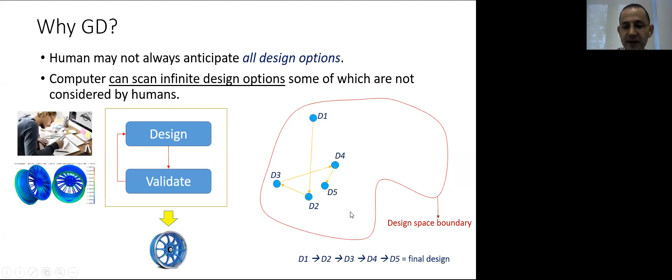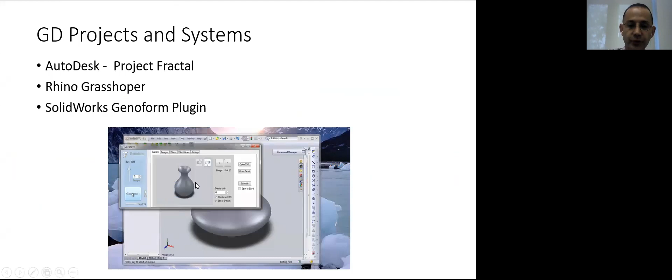So you see here on the left side, there is a cup. So we parameterize this wine glass using design parameters. For example, here we have one cubic Bezier curve for the bottom part. For the top part, we have another Bezier. So these are alpha 0, alpha 1, alpha 2, alpha 3. These are the design parameters. These are the coordinates. Once you change these coordinates, you can generate new designs. So a CAD model for a wine glass with its design parameters.

On the right side, you can see a CAD model for a yacht hull with its design parameters. In case of the yacht model, we have entrance length, middle length, and aft length. Here we have an angle, the entrance angle. We have depth for the entrance section, middle section, and aft section. So first of all, you should define your CAD model using parameters. This is the parameterization step before using generative design algorithms.

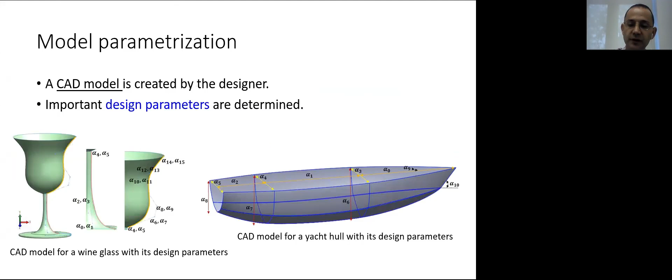So the next step is to set the design space. You can think of the design space as a box. If you have just two parameters, you have a rectangular space with two dimensions. If you have three design parameters, for example, length, width, and height, you have a three-dimensional space. So how do you set your design space? You should first determine the parameter ranges so that you can define a box as a design space.

And next, you should determine and quantize the design specifications. These serve as geometric constraints, defined in advance before starting your design. For example, if you want to design a car, you should at least know its length. If you design a yacht hull, the customer gives you a design specification. He wants you to make it, for example, 1.5 meters high. These are already defined before starting generative design.

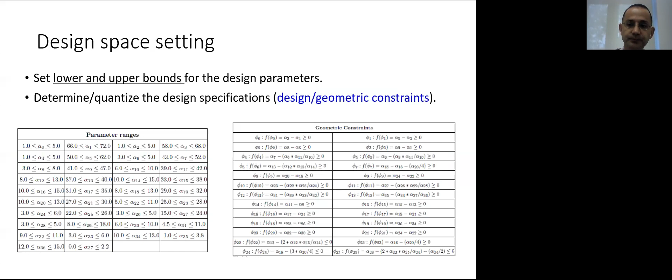So once you define your design space and parameterize your model, you should select the generative design algorithm for your application or propose a new GD algorithm specifically for your problem. You can see here on the bottom a ceramic ewer body. All of these are generated using the generative design technique. So what you should do is use a GD algorithm.

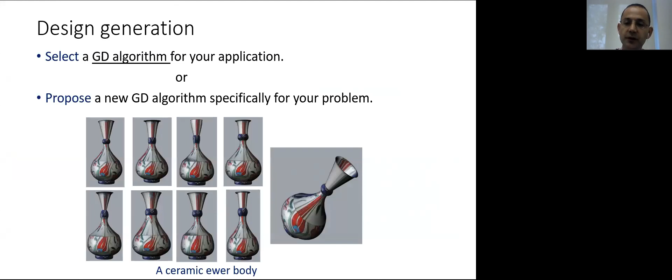So next, I will explain a GD algorithm. This is proposed by our group and published in Computer-Aided Design and Graphical Models journals. So first of all, we should parameterize the model. Let's define some important notations here.

A shape or a design is represented using n-dimensional design coordinates. So we have x1, x2, and xn. Each of these parameters represents a design parameter. Each coordinate here, x1, x2, and xn, represents an axis in the design space.

So for example, if we have a design parameter which is length for a yacht hull, this length parameter represents a dimension, or we can say represents an axis in the design space. So if we have n design parameters, we have an n-dimensional design space. So actually, generative design is a high dimensional problem.

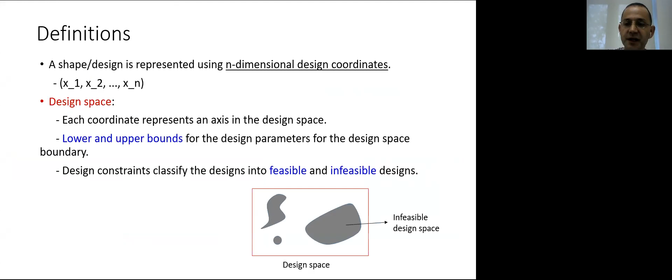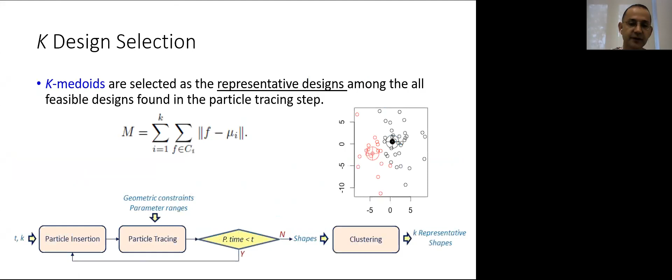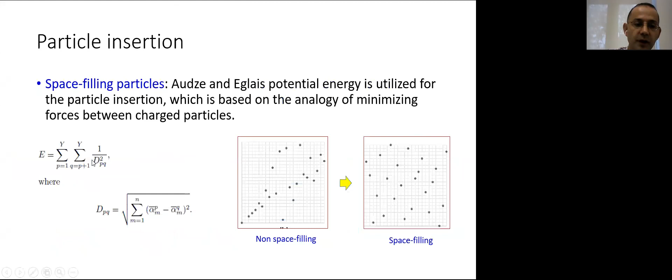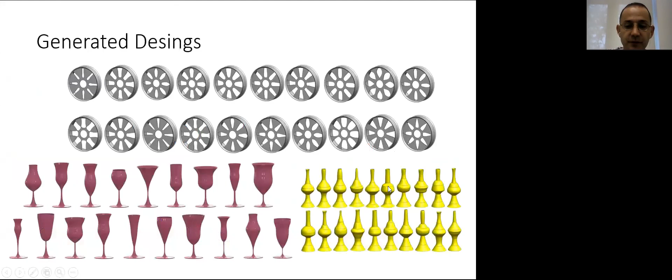So you can see here the examples for wine glass. You can see very interesting shapes here. Some of them may not be producible, but if you include the manufacturability constraint here, you cannot get some infeasible shapes. So these shapes are generated by our algorithm. So this is yacht hulls. Once again, there is no user here. So if you want to check more details, you can refer to these 2 papers, which were published this year, 2018.

Okay, next, I'm going to explain 2 application scenarios for generative design. The first one is for yacht hulls. So here what we did was we introduced the adjective-based design concept in yacht hull design. You may hear it for the first time. In adjective-based design, we express hulls with adjectives such as strong, speedy, and aesthetic. So let's say you have a design model, a CAD model, and you want to make it look strong. What you should do is use our adjective-based hull design framework, and then you can automatically generate a strong model. Otherwise, you should strive for the generation of strong hulls, which may take more than an hour, 1 hour or 2 hours.

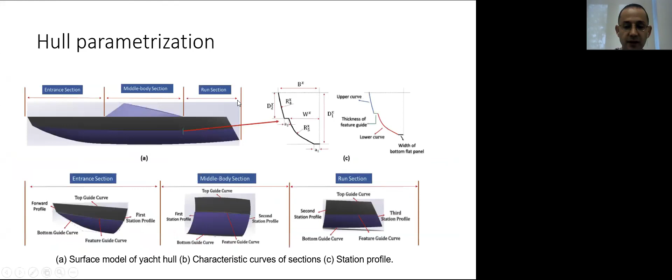If we get the sectional view here between middle body and run section, you can see its appearance. So we have one depth parameter here, a width parameter here, and many more parameters. Similarly, we have length, entrance angle, and so on. So actually, here we have more than 50 design parameters. As I said in the previous slide, we have entrance section, middle body section, and run section. These parameters represent the run section, and others represent middle and entrance sections. When you set these about 54 parameters, you can generate a hull.

So once we parameterize it, what we should do is, for our adjective-based design approach, we should learn the hull adjectives. So actually, we did a survey with more than 100 students in our faculty. So we show some yacht hull models to the users via a Google spreadsheet survey.

So the question here is, which adjective can represent the yacht hull shown below? So you should write here an adjective. So we have a list of adjectives such as strong, aesthetic, compact, and so on. So we did a survey with the students, and at the end, we checked the usage frequency for these hull adjectives. So you see here, the speedy adjective is used more than 100 times. The strong adjective is used more than 80 times, and so on.

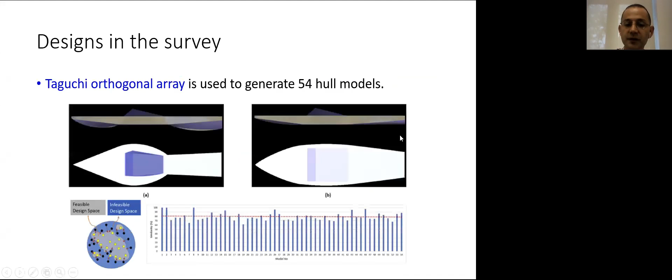So the next issue is to correlate our design parameters with hull adjectives like strong, speedy. So here we use the Kolmogorov-Gabor polynomial to represent the correlation. So it is a polynomial representation. It's a nonlinear one. Here we have y. Here y represents our adjective. For example, in case of the strong adjective, the value of y should be greater than 1.0. So here x represents my design parameter, and a0, a1, a2 are the coefficients which are coming from our neural network.

Can I have a question? What is the full name of GMDH? Group method handling for deep, just a minute, grouping method. I should check it. I'm not very sure, but G is for group, D is maybe for deep learning. I may answer later, okay? This is a neural network approach. I can find out from Google then. Yeah. Let me just check it. Group method of data handling. Okay. Google is very good.

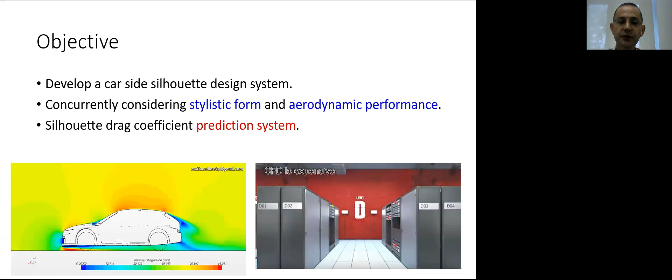So we also develop a silhouette drag coefficient prediction system. This is because CFD tests are very expensive. Just testing a silhouette took about 20 hours. Okay, 20 hours. So it takes too much. Therefore, we should have such a prediction system.

Let's talk about car side silhouettes. The first step in car design begins with simple two-dimensional car side silhouette sketches drawn by a car stylist. So this is the first step. A car stylist gets a pencil and paper, and he draws maybe hundreds of new silhouettes. Among them, they select a few, 2 or 3 of them, and then they can convert them into 3-dimensional ones. So this is the basic design stage for car stylists. Therefore, we focus on just this silhouette.

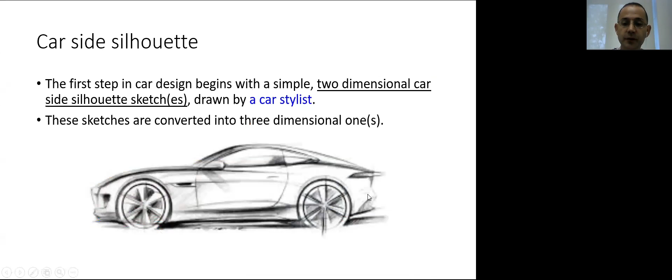So in generative design, once again, we should parameterize the model. A car side silhouette is represented using 9 characteristic lines. You see here we have front bumper line, grille line, hood line, windshield line, roof line, rear windshield line, trunk line, and rear bumper line. So we parameterize them using quadratic or cubic Bezier curves. So we can have different shapes. On the top, you can see different roof styles, windshield styles, grille styles, and bumper styles.

And these X, you see here, X1, X2, we have X3, X4, X5, X6, and so on. These are our design parameters. Actually, these are the control points for the Bezier curves.

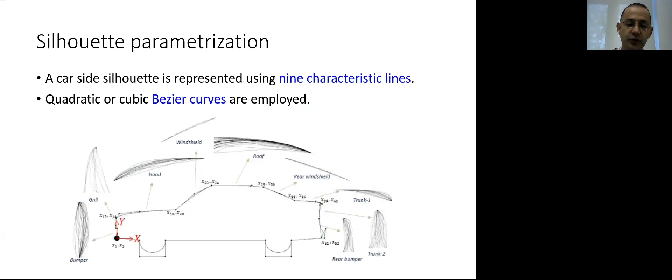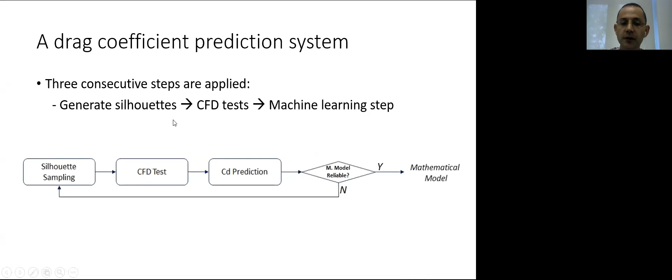So to predict the drag coefficient, we have 3 consecutive steps. The first one is the generation of silhouettes. We call this step silhouette sampling. We sample the silhouettes in the design space; this is a generative design algorithm. And then we test each of the sampled silhouettes using CFD. And then at the end, we use the machine learning step. We iterate these 3 steps until obtaining a reliable mathematical model.

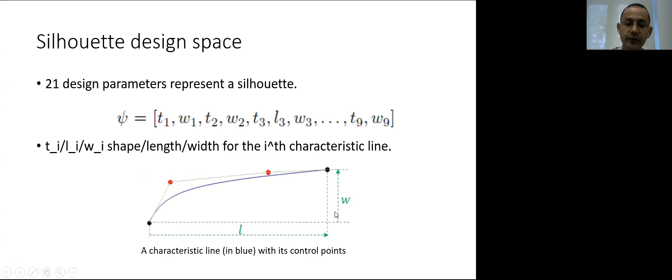So these are 21 design parameters to represent the silhouette: T1, W1, or L3, T9, and so on. T represents the shape, L represents the length, and W represents the width for a characteristic line. So if you have a Bezier curve, let's say this is a hood line, a characteristic line, it has a length and it has a width. So we treat these two parameters as design parameters.

So once again, we should form our design space. To form the design space, we should set the design space boundary. For all the characteristic lines, we set the lower and upper bounds. For example, the height of a bumper line should change between 220 millimeters to 450 millimeters. Once you set these parameter bounds, we have a design space so that you can perform generative design within the design space. So this is our approach.

We should do first silhouette sampling. For silhouette sampling, we have an algorithm. The objective here is to generate distinct silhouettes, as different as possible, because if you just produce similar silhouettes, your CD prediction quality will be low. Therefore, distinction is important. We use here the same formula, Audze Eglais potential energy. We have two terms here, underline E and overline E. Underline E is to generate N distinct silhouettes, and overline E is for the generation of N silhouettes distinct from previously generated M silhouettes. We check the similarity based on the position, slope, and curvatures at the points of the characteristic lines.

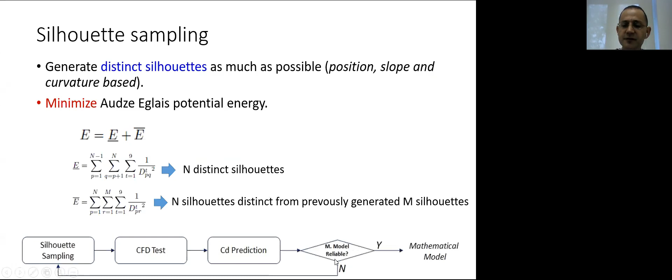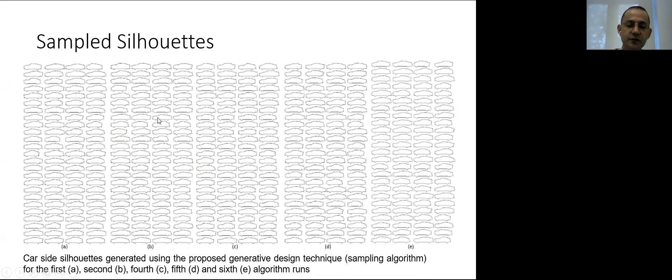So all these silhouettes are generated using our sampling algorithm, you can say a generative design technique. First, we generate 100 silhouettes, then we perform CFD tests, generate a mathematical model using machine learning techniques, and check whether our mathematical model is reliable or not. If it is not reliable, once again I generate 100 models. This is the second 100, the third, fourth, and fifth. At the end of each sampling, we insert them into our silhouette database and generate a mathematical model using machine learning. If it is not reliable, we generate 100 more silhouettes. So in total, we generated 1,000 silhouettes.

Each of these 1,000 silhouettes is tested via computational fluid dynamics tests so that we can compute drag coefficients. Computation for a single silhouette takes about 20 hours, let's say one day, so computing the drag coefficients for 1,000 silhouettes took 1,000 days of computing, okay? It took more than 3 months.

So once we have the data, 1,000 silhouettes with their design parameters and computed drag coefficients, CDs, we perform a two-step machine learning procedure. The first one is principal component analysis, and the other one is regression. At the end, we have principal components, each represented using design parameters such as X3, X51, X4, and so on. Each of these principal components is placed in the equation, and then you can have the drag coefficient values.

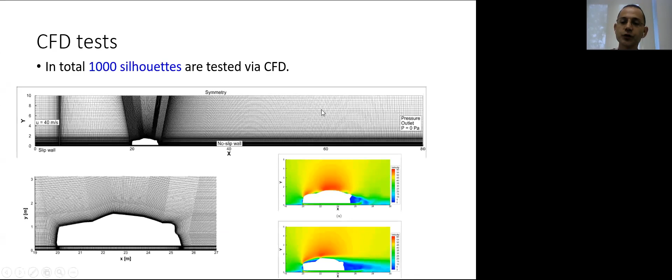So it's very simple. If you use this empirical equation, it takes less than 0.1 seconds, milliseconds, to compute the drag coefficients. Otherwise, you should test using computer CFD analysis, which takes about 1 day. So this simplifies our job. If you have such an empirical formula in design optimization, you have a very big advantage, because in a short time we can define thousands of new designs.

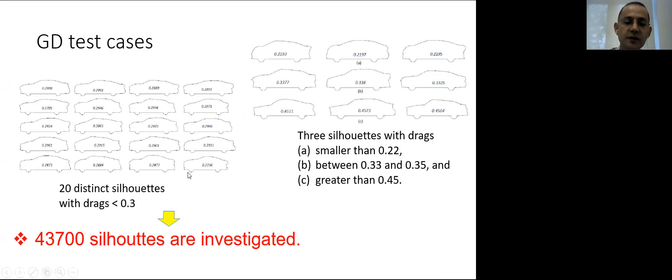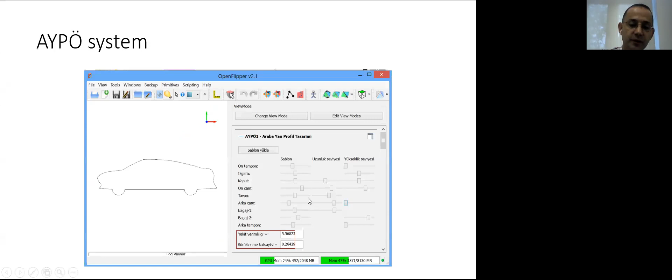Okay, so you can see our system. We call it AYPÖ. This is a car side silhouette recommender system. Once you modify the shape of the silhouettes using sliders, you can see the fuel efficiency rate and the drag coefficient. These are predicted values, computed using the mathematical formula here. This formula computes the drag coefficient.

And I'm going to conclude my talk; these are the final remarks. Generative design is an open issue in computer-aided design and is expected to open new doors in the CAD field. A large number of designs can be scanned in the design space via generative design, some of which may not be considered by designers. Basic steps of GD are, once again, model parameterization, forming the design space, and using an appropriate GD algorithm for synthesizing new shapes.

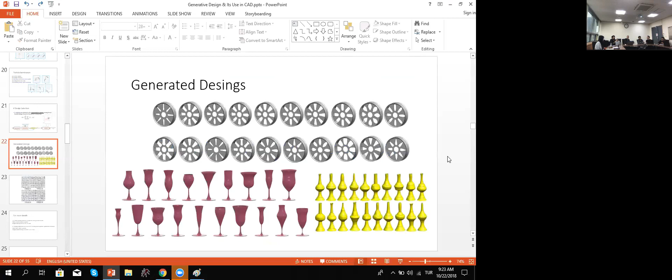I have a question. Can strength testing be included, like the CFD testing? Like in the case of a rim, it has to be tested via FEM, whether it is good over the life cycle or not. Actually, it's very difficult to understand the question. Can you repeat? How can we include FEM? Include. Okay. Finite element analysis. Including finite element method. How can we include finite element method in the case of the wheel rim?

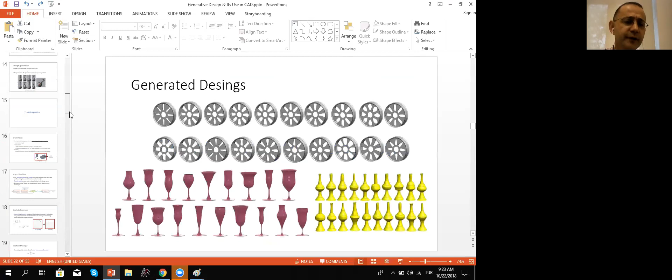Okay. So actually, we haven't included FEM in the wheel rim case, but I think you are talking about this slide. This is just for illustration. Actually, in generative design, you can include finite element in two ways. The first one is you can integrate your CAE software into your generative design software. But this is very costly; it has a high computational cost. Therefore, you should simplify the FEM simulation. If you simplify it, you can simulate it in a short time.

For example, the real simulation takes about 3 hours, let's say. If you simplify your simulation, it may take less than 5 seconds, so you can try different options. So the first one is you can simplify. Another one is you can do machine learning. You can try many options of wheel rim FE simulation, let's say 1,000 or 100 tests, and then you have training data. Using this training data, you can obtain a mathematical model to predict the stresses on the wheel rim.

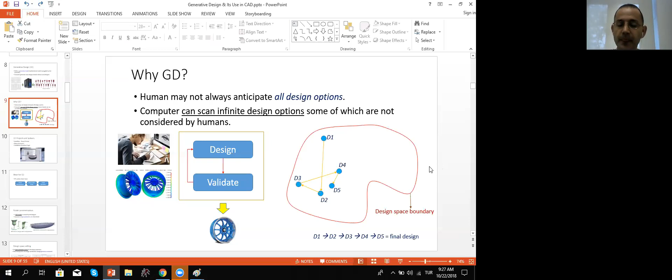Why? Because in machine learning, if you have lots of parameters, it's very hard to handle, or it's very hard to obtain a reliable mathematical form. Therefore, they use principal component analysis to decrease the number of parameters. Thanks. Yeah.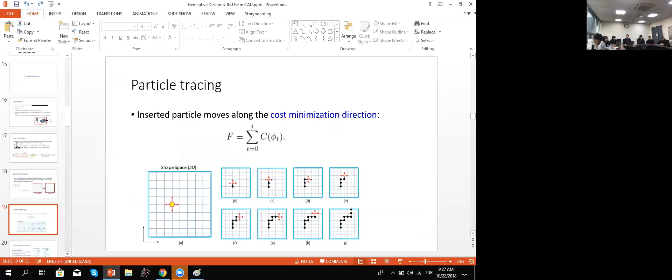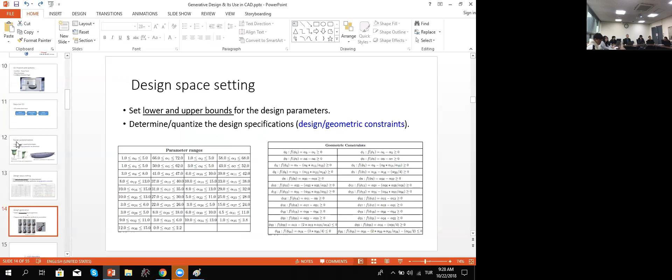Professor, I have two questions. Okay. First, regarding parameterization. You showed us a parameterization tree. Okay. Is that how there were different sections in the ship? Just a minute, I'm going to open it. Here. Okay. Yes. So there are 3 different sections in the ship. It can be more depending on our model.

So is there a chance that there is any redundant parameter or 2 related parameters? Yeah, I see. Actually, in the machine learning step, you should avoid redundant parameters. Your point is true. Here we obtain these parameters manually, so we visually inspect the hull using these parameters. So actually, there are not too many redundant parameters here.

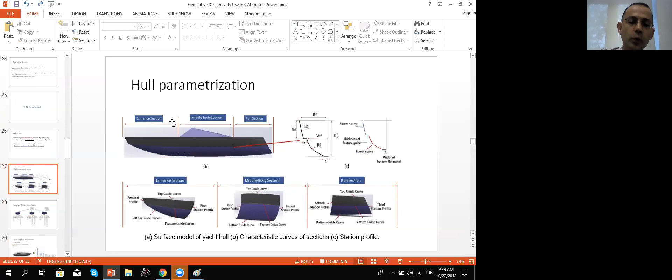For example, the first parameter is length for entrance. Another parameter is length for middle body, and another one is for run section. So if you have these lengths, an overall length would be redundant with these length parameters, right? So actually, we don't have redundant parameters, I think.

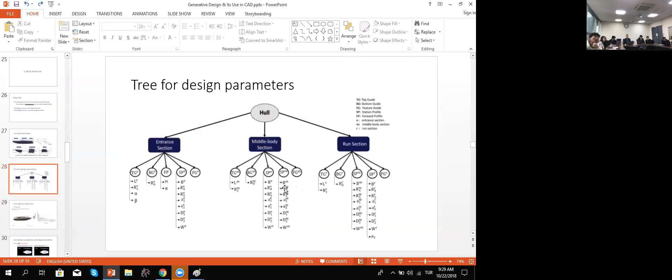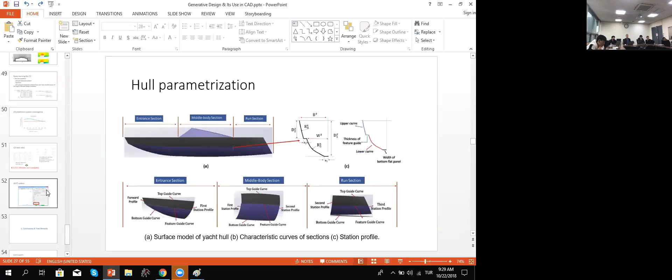My second question is regarding the 2 softwares which you showed us. Which one? The first one, let's say for the yacht. This one, you mean? Your lab software. Yeah. Okay, I see. This one or the other one, Modia? The first one. Yeah. Okay. So, Professor, are you using some libraries?

Actually, we use Parasolid libraries to develop this one. This is based on B-spline curves and Coons patches. Therefore, we mainly use these class libraries while developing shape operators and attribute-based modeling.

If you want to download this software, on our website there's a software section. Here you can get the exe file, and then there are manuals so that you can install it on your PC. Okay. Thank you very much, Professor. Yeah, my pleasure.

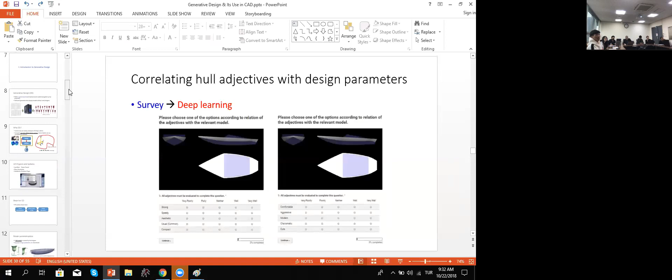Do you have international students? Sorry? International students. Yes, we have international students. Actually, this software was developed by a guy from Pakistan. You know him, Shahroz, I think, Professor. When you were there, you met Shahroz and Kemal. You remember? Your friend? I don't know. What was his undergrad university? Did he complete his bachelor's in Pakistan?

Actually, this software was developed by my master's student who is from Pakistan. The question is, has the student from Pakistan got his bachelor's degree from Pakistan? Yes, he got his degree from Pakistan. He did his master's here, and right now he's at the University of Strathclyde in the United Kingdom. His question was which university in Pakistan? I'm not sure actually. Maybe you can check. Okay.

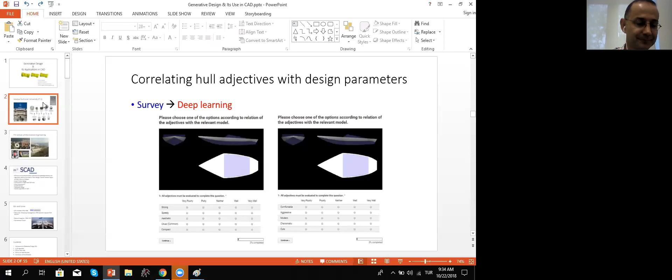I found that your university is very old. Very old, yes. 250 years. About 250 years, yes. What was the first university? It is 1453. When Turkish people took Istanbul, they directly established a university. In 1453, it's Istanbul University. 1453, yeah. 300 years more. Yeah. All right.